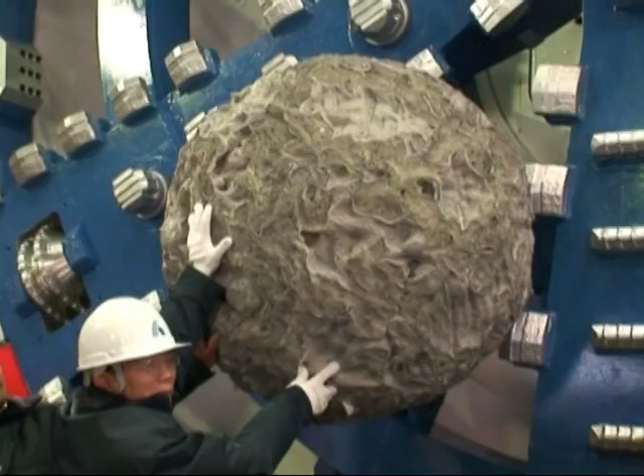A major consideration for the design of the cutter head and teeth was its effectiveness in tunneling through the gravel layer. A diameter of less than 65 centimeters meant that gravel could be directly transferred to the debris hopper, while if it were more than 65 centimeters, the rock would need to be broken up first. The main considerations were to reduce the need for replacement heads, ease of installing replacements, and ability to manage large blocks of gravel.

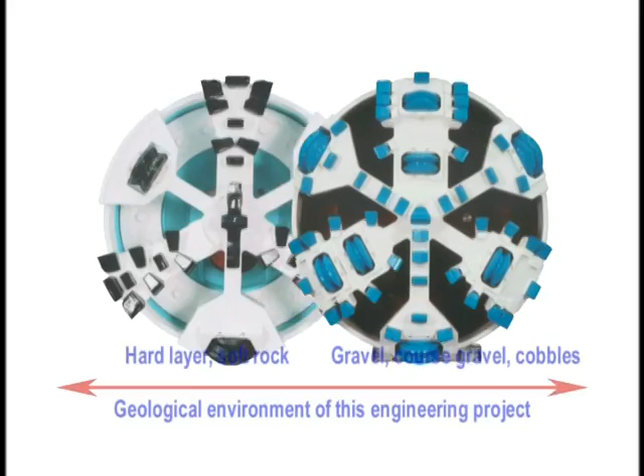The design of the cutter head had to consider performance in both the gravel layer and sandstone layer. A combination configuration that could handle both soft rock and gravel was therefore chosen. A structure of outward radiating spokes was chosen, using a larger opening ratio, so that gravel could be transferred efficiently to the hopper. Central rings and stop blocks were placed between the spokes to prevent gravel pieces larger than 65 centimeters from passing through the cutting face.

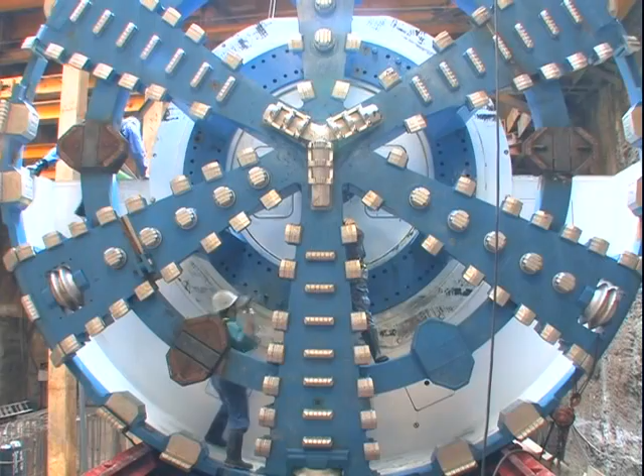In considering the diameter of the shield machine, its stability at the digging face, and debris removal, a partial use of semi-dome and intermediate support design was adopted for the cutter head.

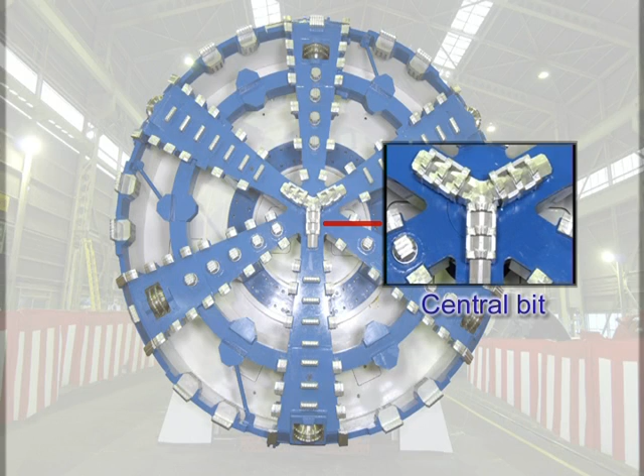The bit configuration for the cutter head can be described as follows: roller cutter, peripheral face bit, cylinder face bit, scrape teeth, central bit, and copy cutter. In addition, hard plates and bit protectors are installed on the shell to protect the bits.

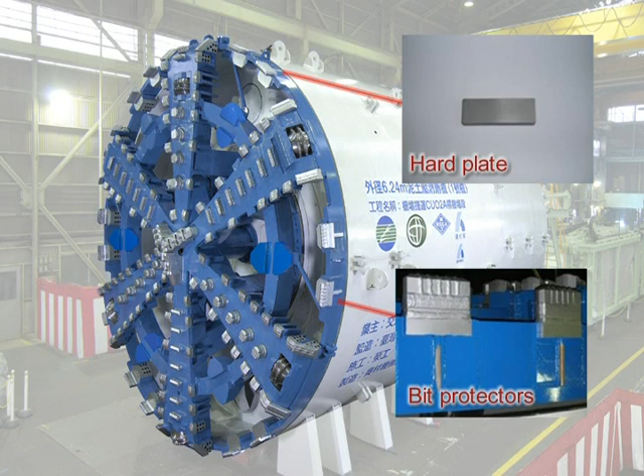The main consideration for this configuration is to ensure that gravel pieces less than 65 centimeters in size are agitated between the cylinder bit and the face bit, while gravel pieces larger than 65 centimeters are broken up by the roller cutter and then transferred to the hopper by the scraping bit.

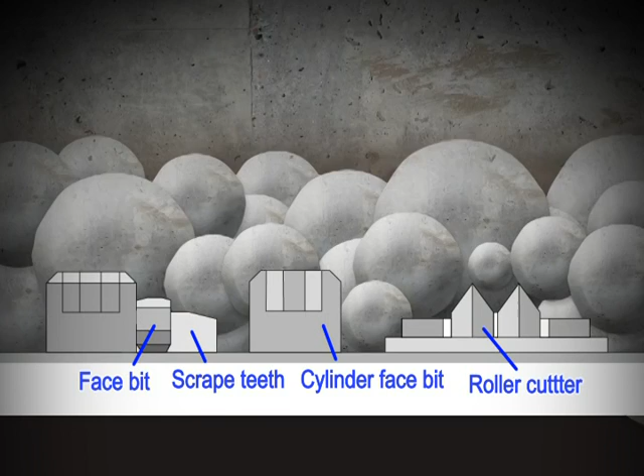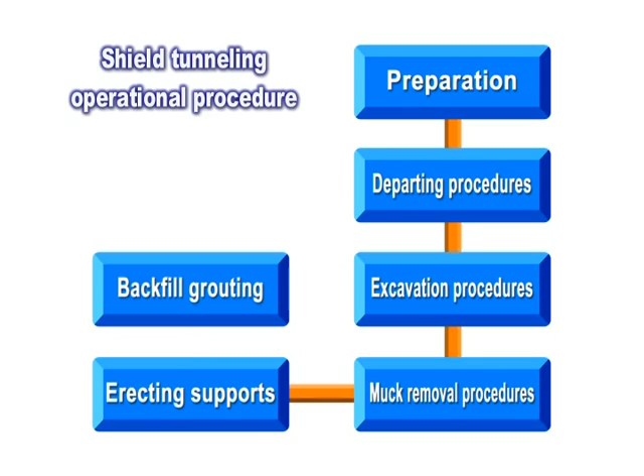The vertical shaft is the location at which the shield machine begins to tunnel, and is where staff and equipment such as shield segments, rails, rail ties, utility pipes, and cables enter the tunnel.

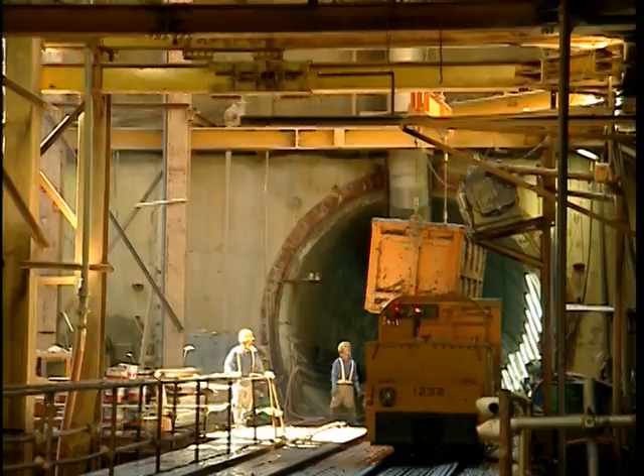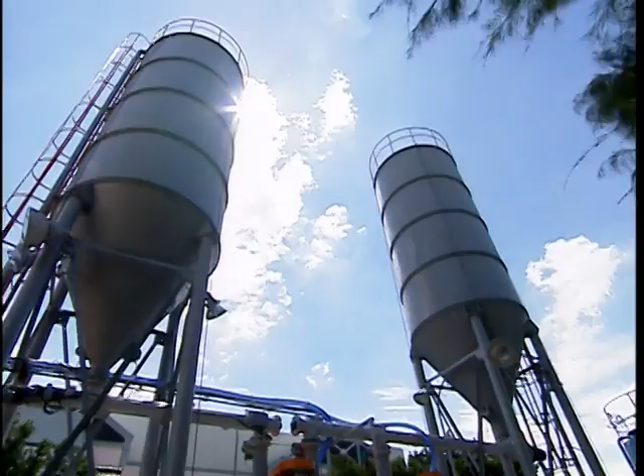It is necessary to establish a construction base on the surface near the vertical shaft. This houses cranes, muck removal equipment, backfill grouting equipment, an area to stack support segments, a storage area for rail tie and track materials, electricity provisioning equipment, and other related facilities in order to ensure that the tunneling goes smoothly.

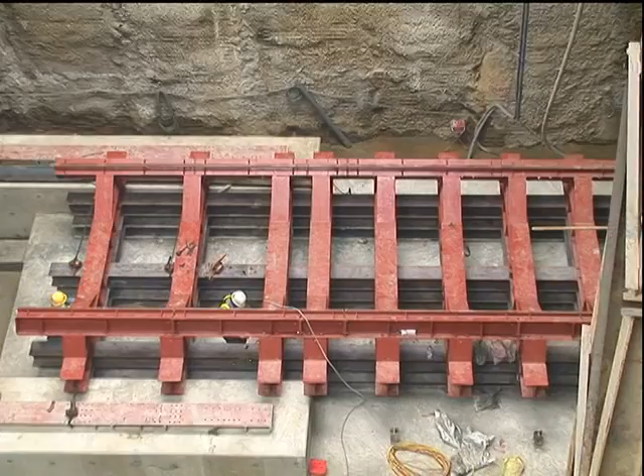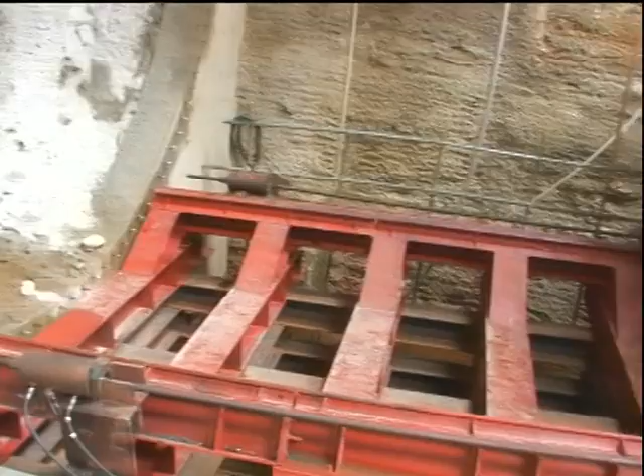Before departing procedures, the vertical shaft must be fully supported so as to bear the weight of the shield machine and allow for adjustment of the machine's height and gradient when it commences boring. As the mixture of water for soil extraction in the first stage of breaking the surface can easily lead to subsidence, ground treatments are necessary before work begins.

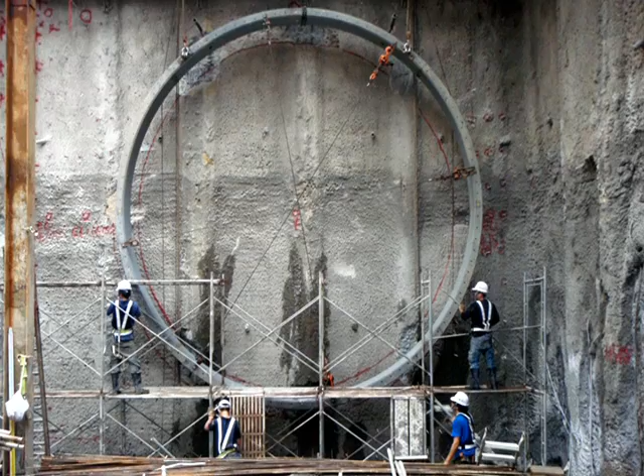Before boring commences, an outer circle must be cut in the retaining wall of the vertical shaft so that a tunnel ring and shield components can be installed. These are made up of thin steel plates that are fixed onto the tunnel wall. On the interior entrance, packing is used to link with the retaining wall and the shield machine, and to support the shield, creating a waterproof barrier.

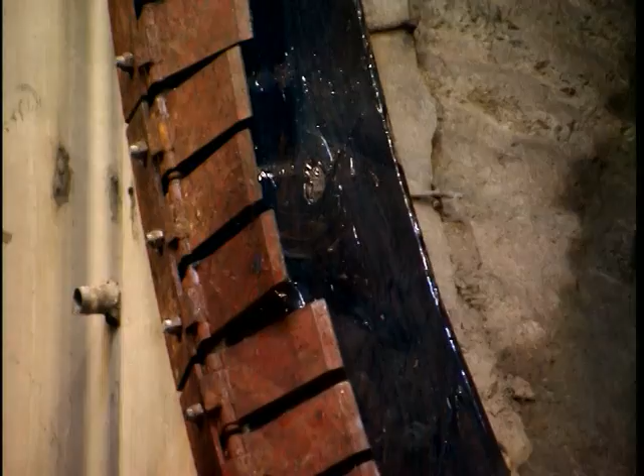To prevent earth and water seepage into the tunnel when the shield machine begins to operate, safety at this stage is a foremost consideration.

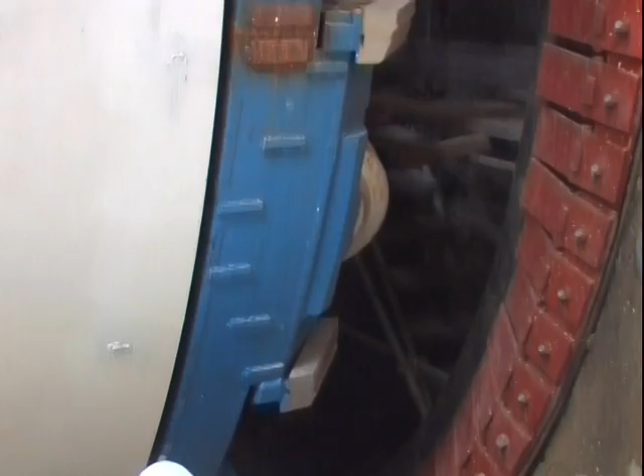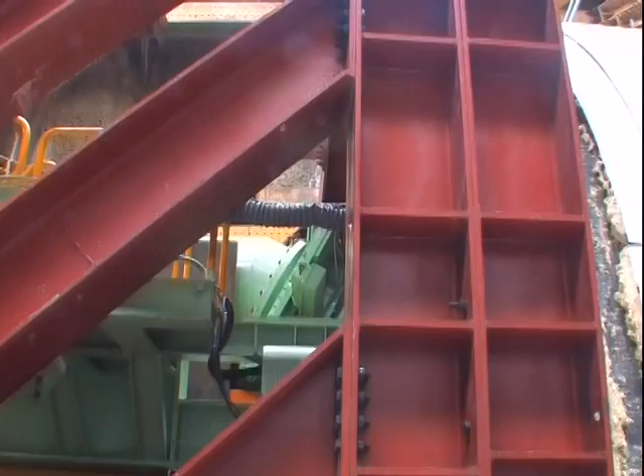At the initial stage, the friction between the shield segments and the soil is not sufficient to provide traction for the shield machine. It is necessary for a reaction base to be placed behind the tail shield in the vertical shaft to give the jacks a fixed point against which to push forward.

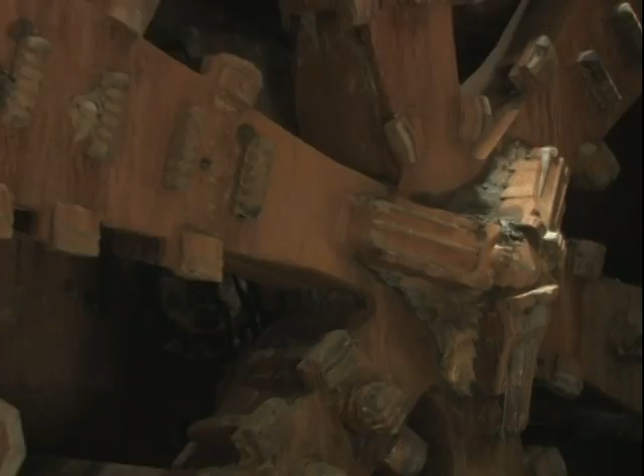During tunneling, the motor drives the cutter head. The debris generated fills in the retaining area against the tunnel face and side walls, increasing outward pressure. When this happens, the shield machine's propulsion stabilizes.

The screw conveyor draws out the debris, which is then transported to the base of the vertical shaft. Vertical lifters draw up the debris, which is then transferred to skips, where it is temporarily stored.

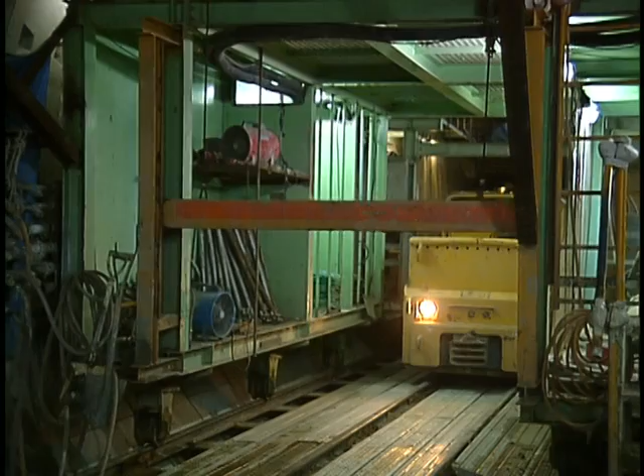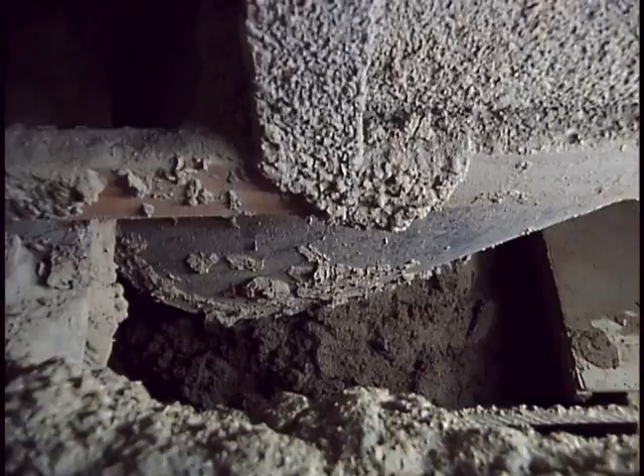Muck removal procedures are an important step in shield tunneling. If the flow of the debris becomes too sluggish, the pressure in the retaining area falls. This can lead to a looseness in the tunneling wall. To avoid this, the smooth flow of debris must be ensured through the use of additive material.

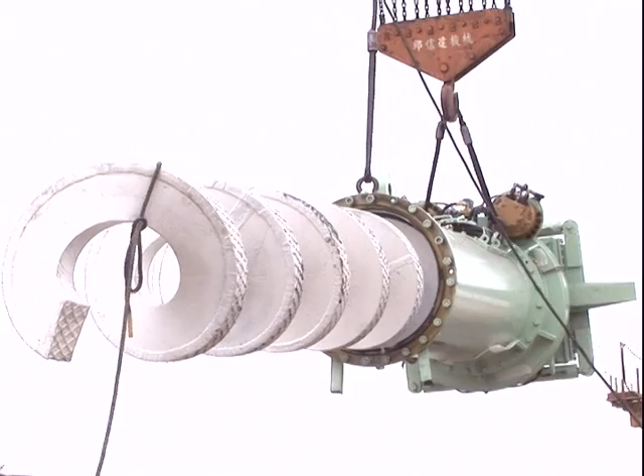The muck removal procedures use a valve-controlled, shaftless screw conveyor system. Two settings are available, depending on whether drilling is taking place in gravel or sandstone layer, so as to avoid gravel blocking the screw mechanism and to facilitate the evacuation of large-diameter rocks.

The conveyor mechanism also has 3 outlets and 5 injection openings that can be used in the event of a blockage.

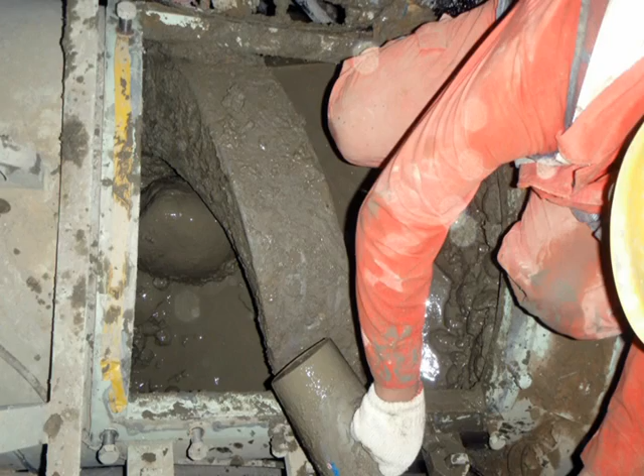To respond to the different rock layers met with during digging, including gravel and wind-eroded sandstone, the screw conveyor can be set to 2 different speed settings.

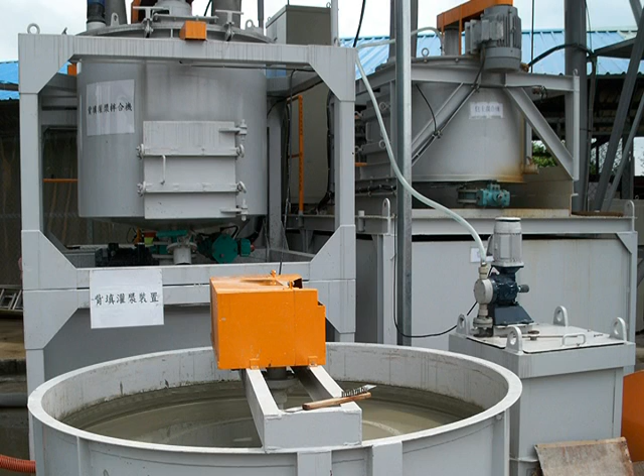To stabilize the pressure of the shield machine against the drill face and improve flow of debris, and reduce the risk of debris becoming compacted and affecting muck removal procedures, earth pressure shield tunneling often makes use of earth filling equipment, injecting mud around the cutter head and retaining area.

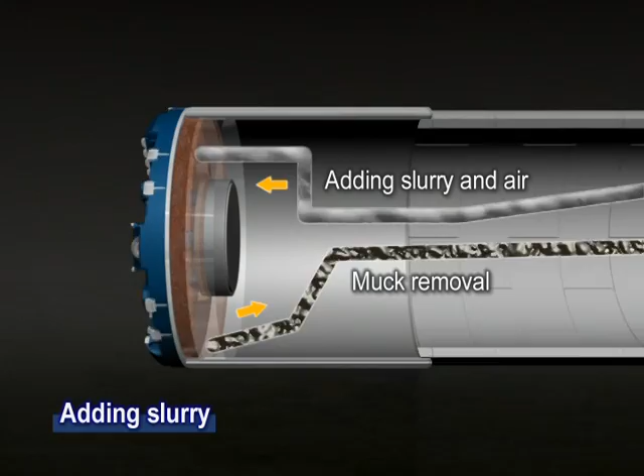This material is churned into the debris. The churning equipment includes the following: 1. Paddles located behind the rotary head. 2. Spokes used to facilitate muck removal.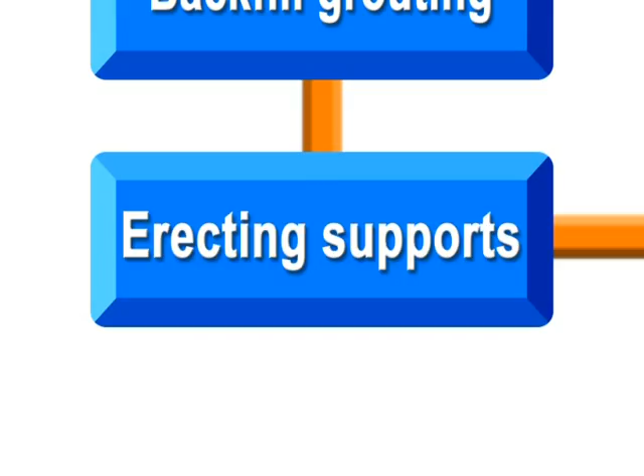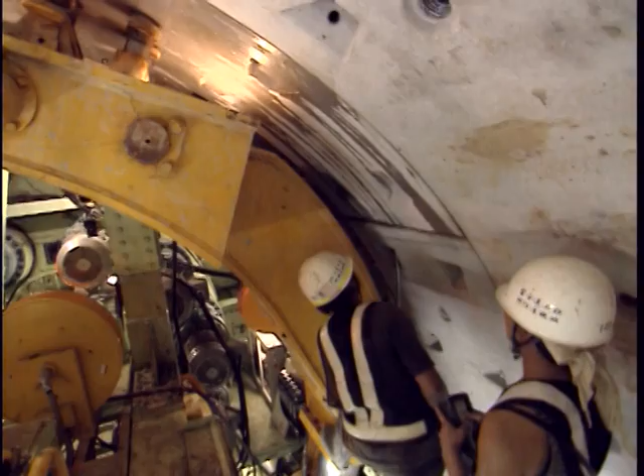After completing 1 unit of drilling, shield segments will be installed behind the shield tail. These are usually made up of precast steel reinforced concrete or steel ring sections. After the shield units are installed, it is necessary to check the integrity of the structure, which is upheld through its circular form.

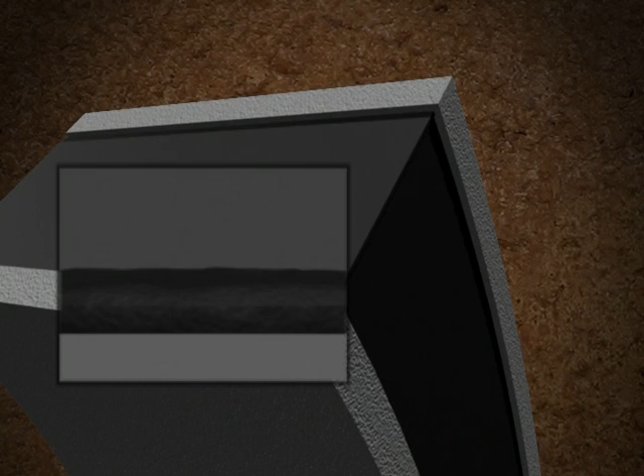To prevent seepage between the joins, the segments dovetail into each other over a waterproof seal. When the support sections are completely installed, the seal material is pressed together to form a waterproof barrier.

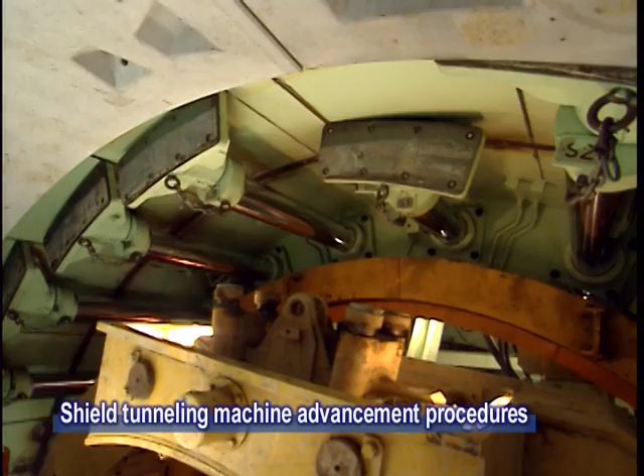Jacks are placed behind the shield machine when it is ready to begin boring. The placement of the jacks allows for the adjustment in the forward direction of the shield machine. A number of separate jacks are used to avoid concentration of force in a particular area that might cause damage to the shield.

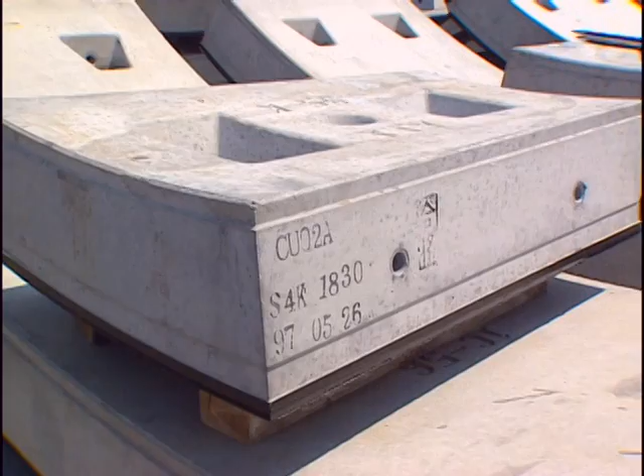The shield segments are generally made from precast steel reinforced concrete, except in a small number of communication tunnels where steel sections are used. The concrete sections are stored until needed in the factory where they are made. Only then are they transported to the construction site.

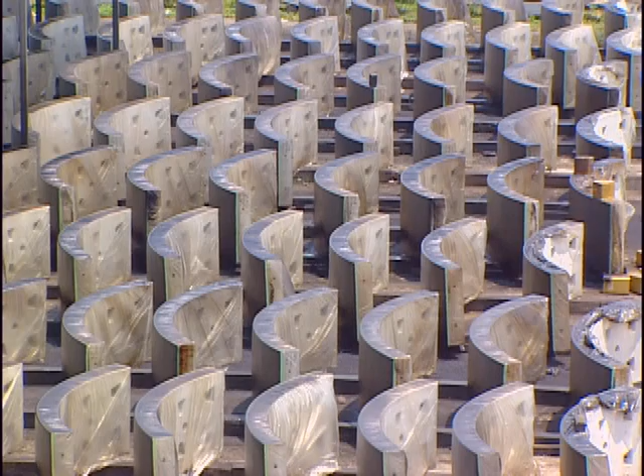As the precast steel reinforced concrete segments have to withstand enormous pressure, high standards must be maintained during their production. 1. Manufacturing plant for shield segments. As the sections are heavy and easily damaged, selection of a suitable storage area is of great importance.

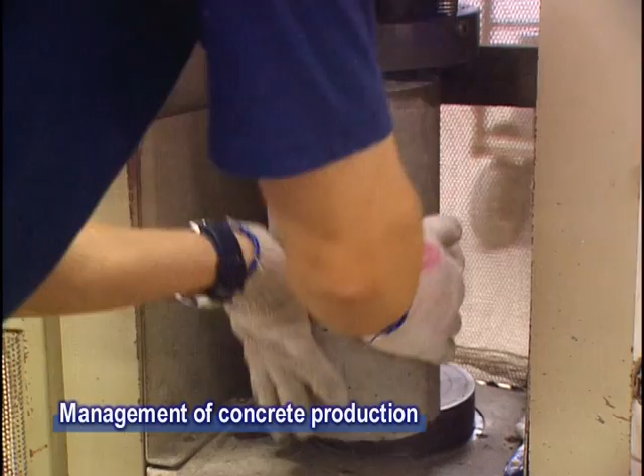2. Management of concrete production. All production materials must undergo inspection to ensure that they meet required standards.

3. Management of concrete pouring. Placement of steel must be inspected before the concrete is poured.

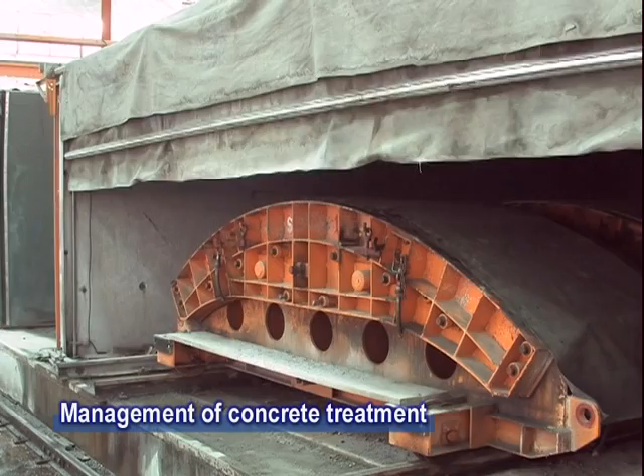4. Management of concrete treatment. Low-pressure steam curing is used to expedite hardening and facilitate removal from the mold.

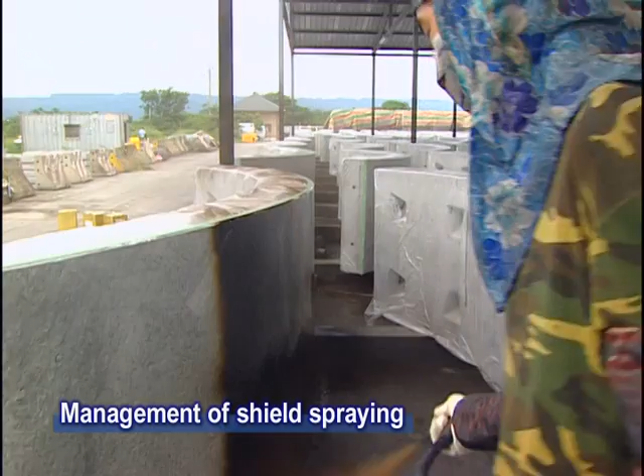5. Management of shield spraying. To prevent corrosion and rusting, the ring sections must be sprayed with bitumen or resin. Spraying should take place in a covered facility inside the precast production plant.

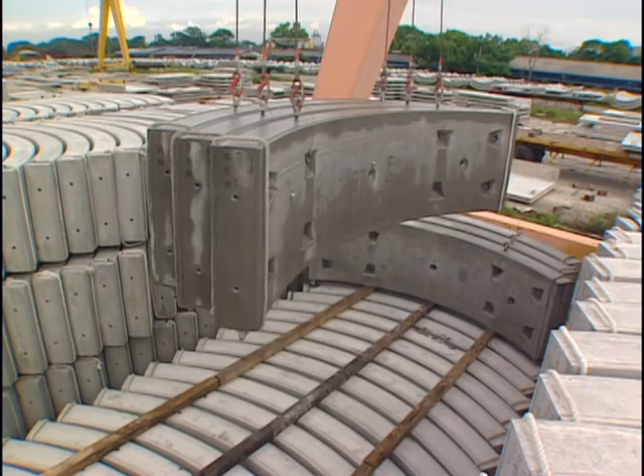6. Management of shield segment storage. Each storage level of the ring sections should be protected by padding to avoid damage.

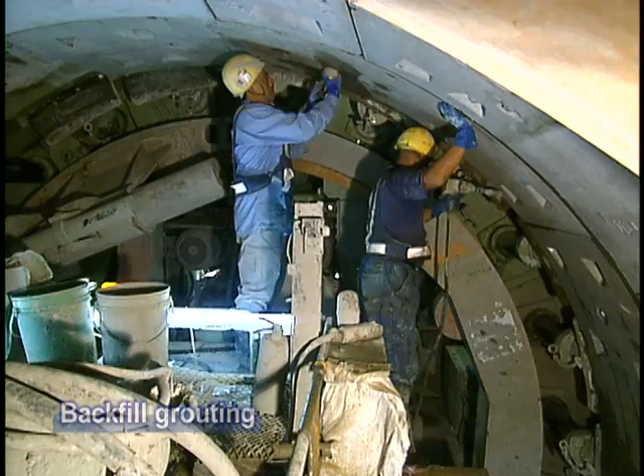After the shield segments have been assembled, backfill grouting will commence. The hoisting eyes are used as injection inlets for the backfilling operation, in which a cementing material is poured under pressure into the injection equipment to fill and consolidate the space outside and at the tail ends of the shield. This prevents loosening of the soil and reduces the risk of subsidence.

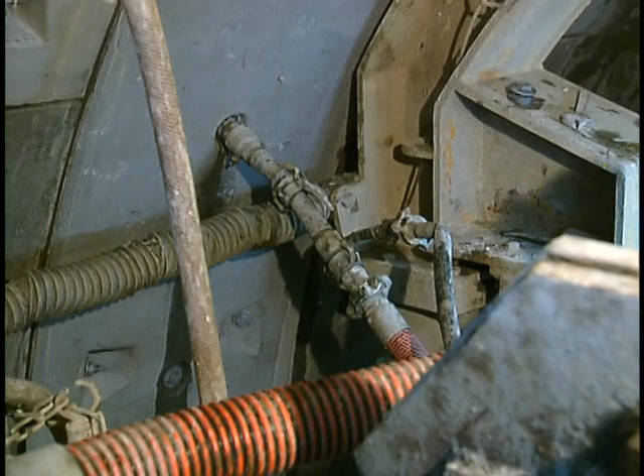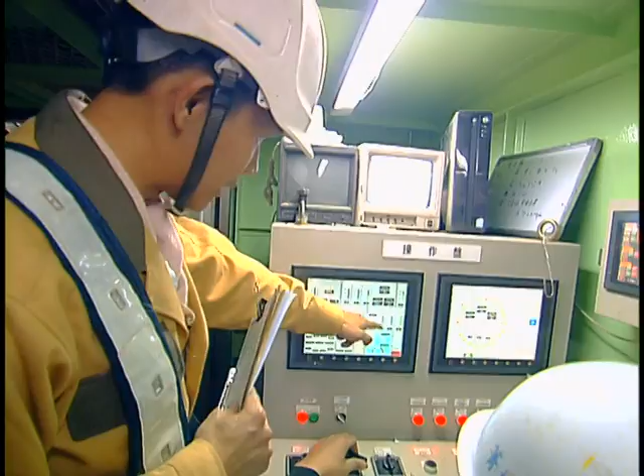When the tunneling machine approaches its exit point, it must reduce boring speed, and exit point ground treatment and testing must be carried out. Circumference and elevation must be marked before surface breakthrough can begin.

To ensure the integrity of the surface area before the tunneling machine exits, a support barrier must be placed around the exit point. The exit point must also be sprayed with concrete. Chamber separation and counterforce support must all be put in place.

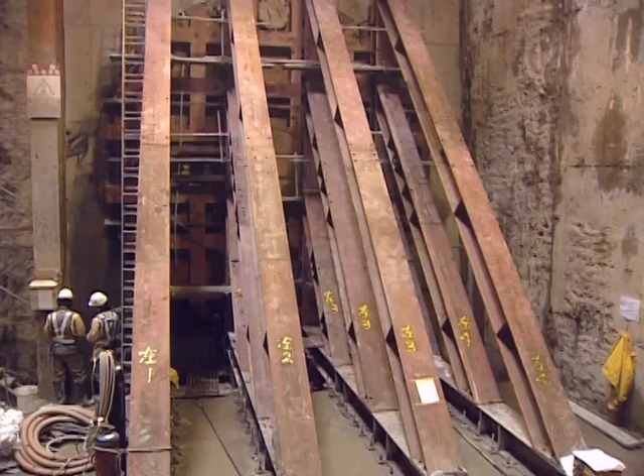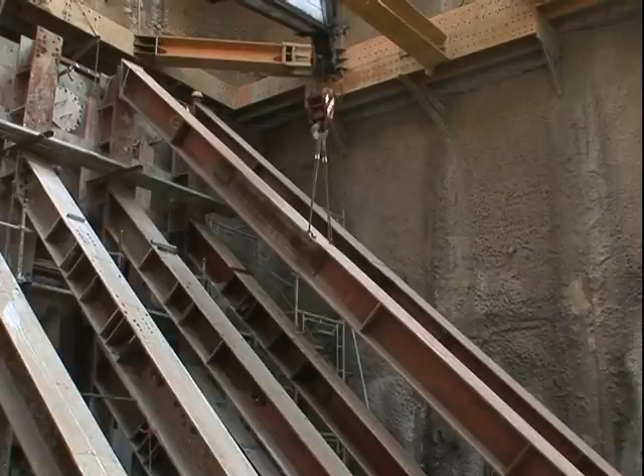The counterforce supports and chamber separation barriers can only be removed after the tunneling machine has exited and the exit point has been tested for water seepage and measured. After that, the waterproof seals and pressure plates are installed. Finally, an arrival platform for the tunneling machine is constructed.

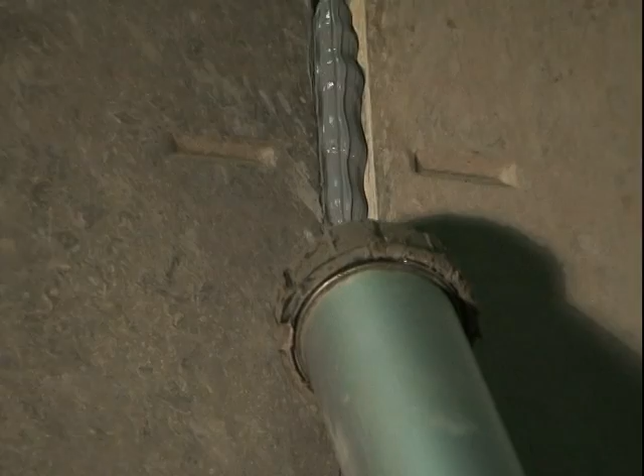The machine is pushed into the vertical shaft and disassembled. After that, the tunnel is checked for connectivity, treated against seepage, and any cracks are filled in. Inverted arch and communication paths are constructed, completing the tunneling process.

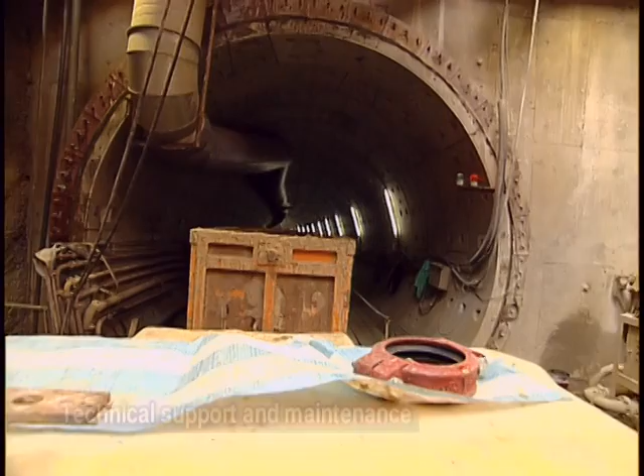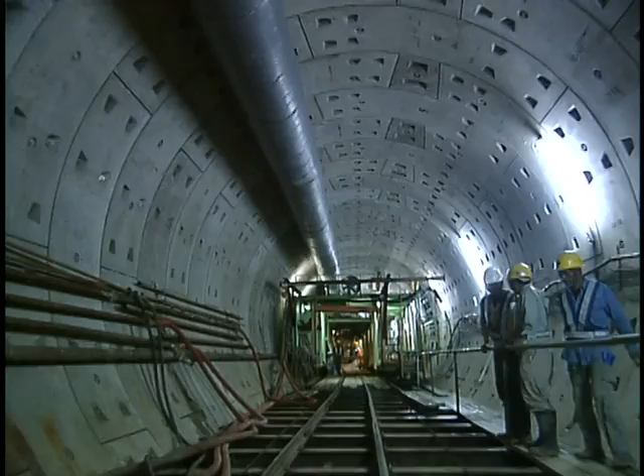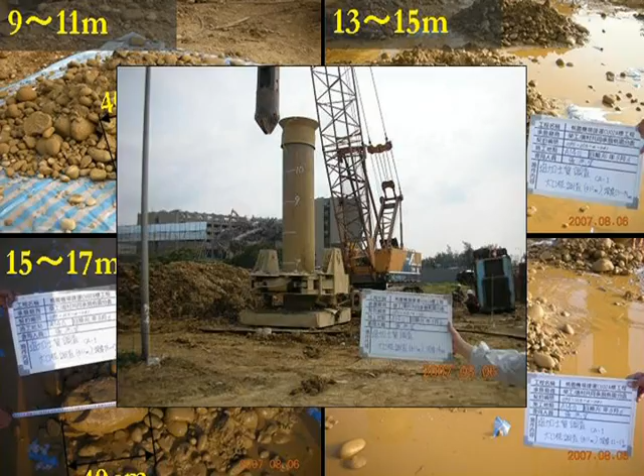Careful geological surveys were conducted as the basis for the design of the cutter head. Despite this, unusual geological factors created blockages in the hopper that prevented further progress.

After stopping work, it was concluded that there had been insufficient mixing of material in the hopper and a hardening of material in the hopper due to long periods when the machine had been idle.

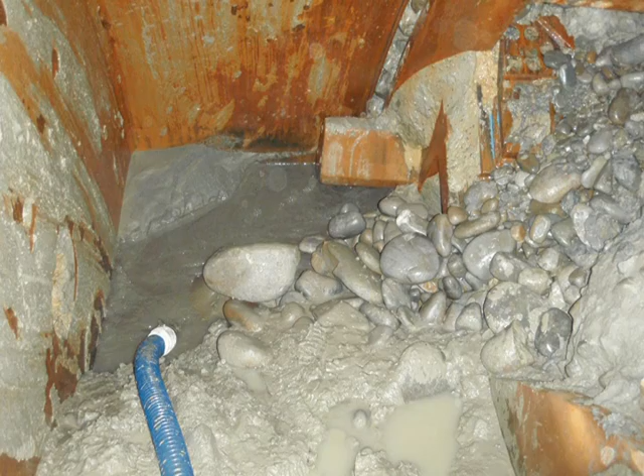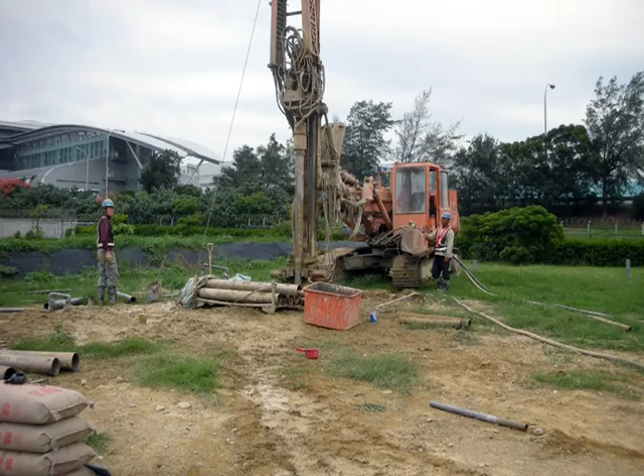It was necessary to open up the hopper to clear the debris. Before doing this, vacuum wells had to be sunk in the vicinity of the shield machine and the groundwater level lowered to a point at the base of the machine. It was then necessary to conduct water and toxic gas tests and ventilate any harmful substances before the hopper could be opened.

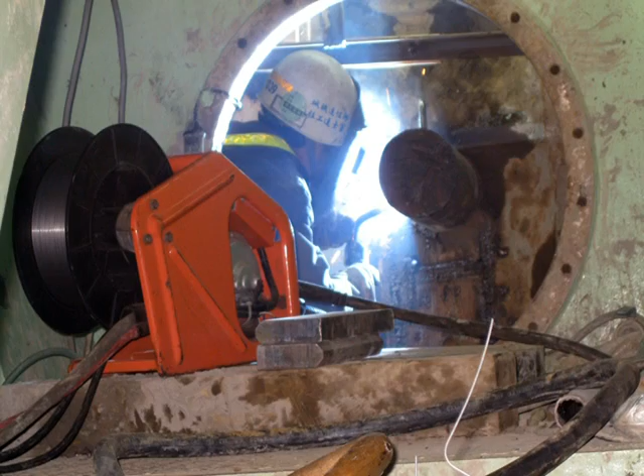An additional stirring blade was added to the inner face of the cutter head and on the bulkhead wall to prevent material in the hopper solidifying. Once operations recommenced, this situation did not recur.

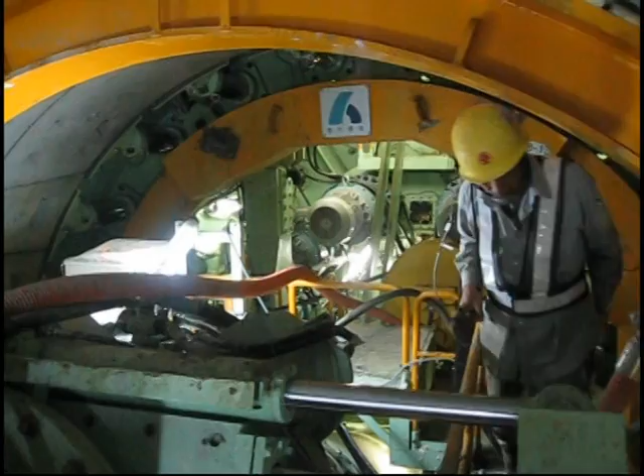When machines 8 and 9 reached the Section 340 communications passage, where surface treatment had been applied, water levels were reduced in preparation for an inspection of the condition of the bits. After tests for toxic gas, it was found that levels of carbon monoxide and methane were in excess of safety standards. Inspection procedures were halted and ventilation shafts were drilled to release the gases.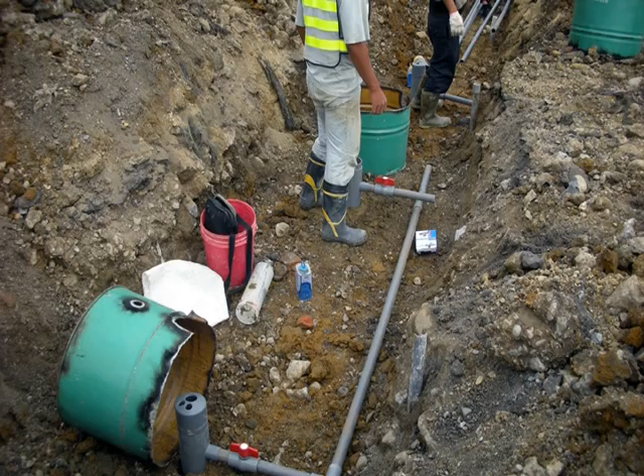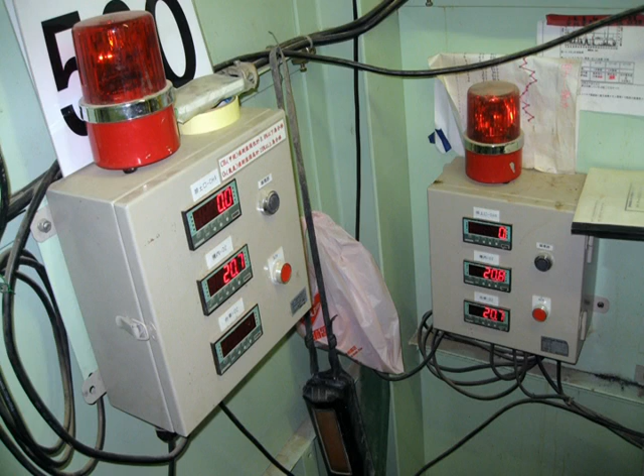Sensors to monitor toxic gas were also installed at the screw shaft debris outlet so that this situation could be monitored continuously. Ventilation shafts were also added to the tunnel to reduce permeation of the gases and ensure worker safety.

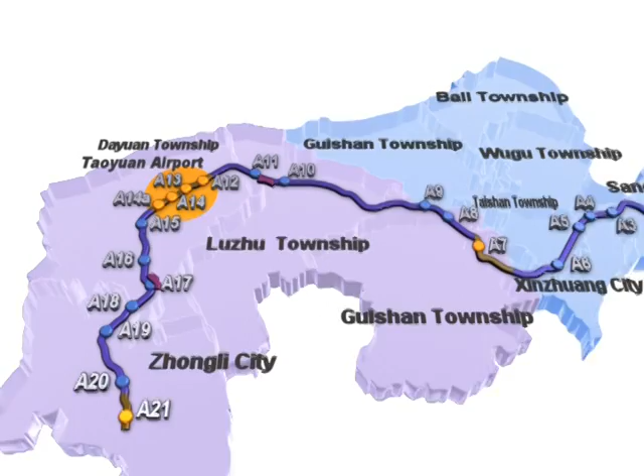The airport section, built using the shield tunneling method, is a key section of the whole project. In total, it made use of 10 work shafts and 8 shield machines. The section includes 4 underground stations and extends for a distance of 7.2 kilometers.

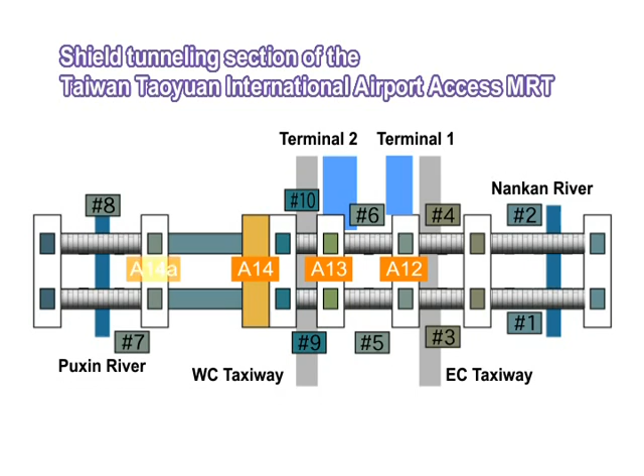Work on this section of the tunnel commenced on April 19, 2006, using 8 shield machines. As of January 29, 2010, 10 sections of tunnel had been completed, with an average progress of 4 to 4.5 meters per day per machine, drilling through gravel layer based on total construction time.

This was in line with pre-construction estimates. Subtracting holidays, maintenance days, and work stoppages due to other types of construction work, the machines progressed at 7 to 8 meters a day under proper management.

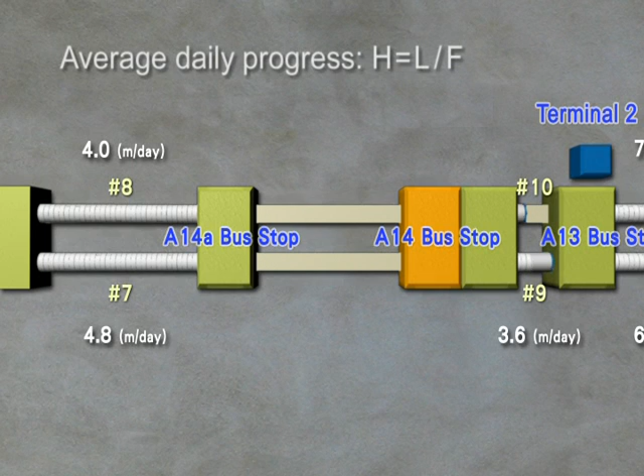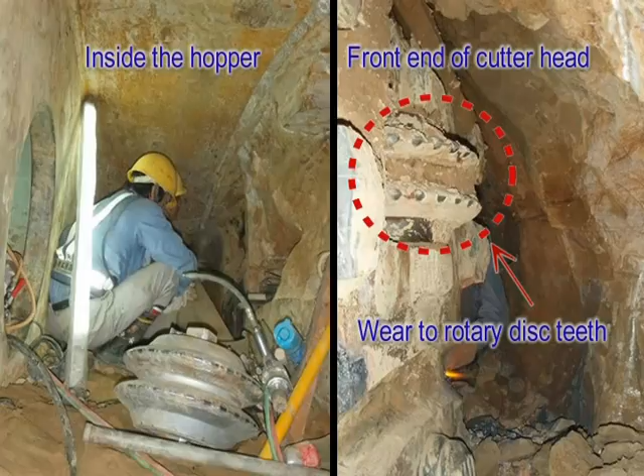After inspection and correlation of data, it appeared that the cylinder bit, as the first element to come in contact with the digging face, suffered from wear at 2 to 4 times the rate of other bits, which greatly exceeded permitted levels of wear.

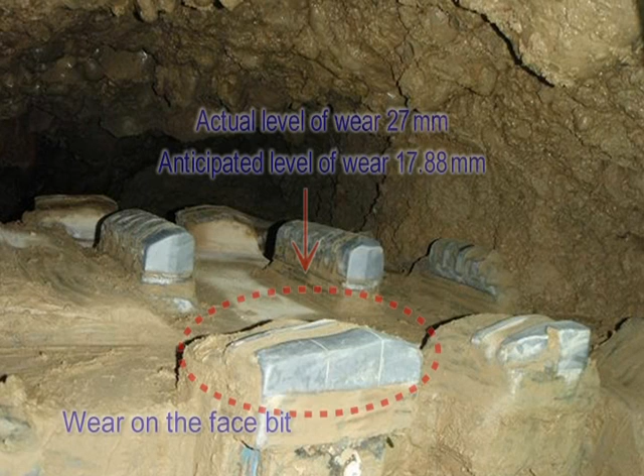The peripheral bit, with the exception of damage caused by impacts, suffered wear of only 20% of original estimates. The face bits, located on the outer edge, had serious wear issues of 1.5 times estimates, while those on the inside had wear of just 20%.

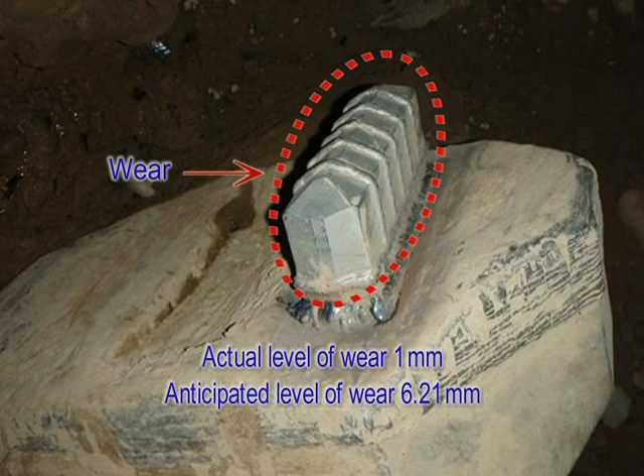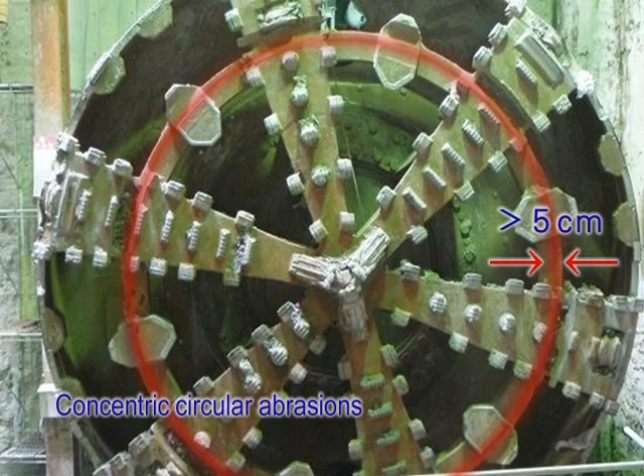Wear on the roller cutter was less than expected. In addition, when passing through sandstone layer, the cylinder drive was unable to effectively cut through the rock face. 5-centimeter concentric circular abrasions were created. This had to be repaired by opening the chamber.

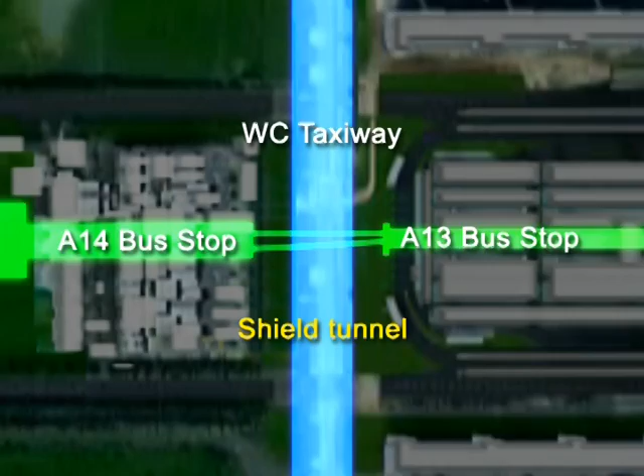During construction, the project was subject to quality control and safety supervision of the very highest level. For example, immediate backfill grouting reduced to a minimum the risk of subsidence in airport structures.

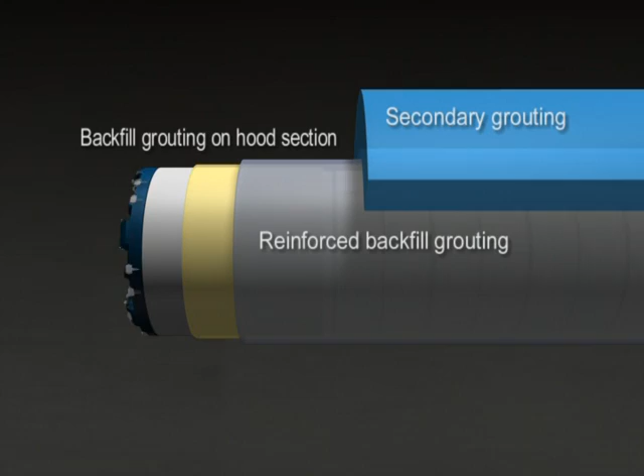In the control tower and taxiway area, micropile cutoff walls, reinforced backfill, and secondary grouting were used for reinforced protection. Ground treatments were made in places where the shield machines operate to prevent subsidence.

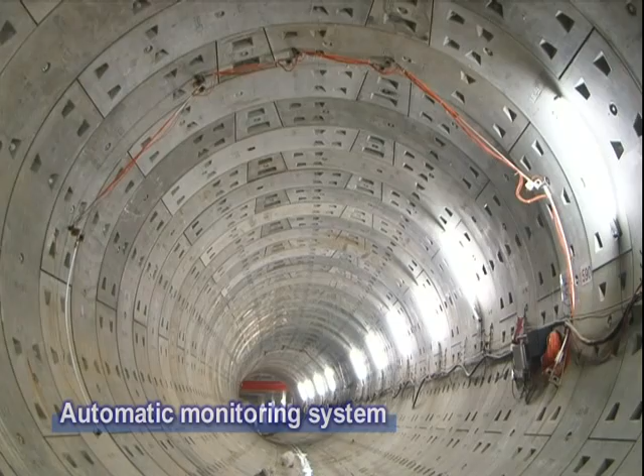During construction in the vicinity of the control tower and under the taxiway, various automatic monitoring systems were in place to provide a real-time record of the construction process, revealing immediately any effects on the geological or architectural structure of the ground, ensuring that a high level of safety management is achieved.

Construction on this section took place in a complex geological environment in which it was necessary to ensure uninterrupted airport services above ground. Through the course of construction, the neatness of the surface environment was maintained and traffic flow was not disrupted in any way.

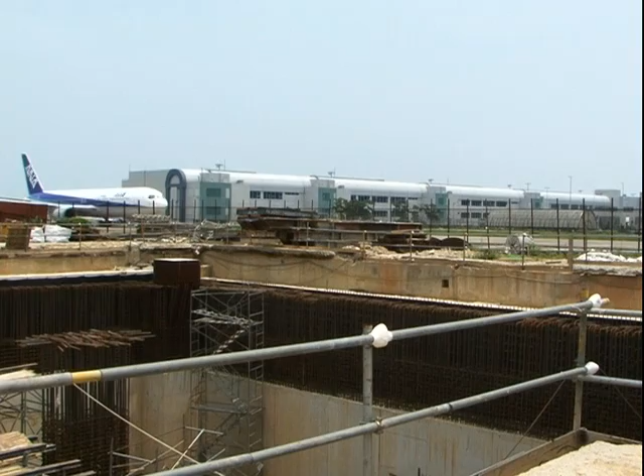Total subsidence for the tower and taxiway area remained within 0.4 centimeters.